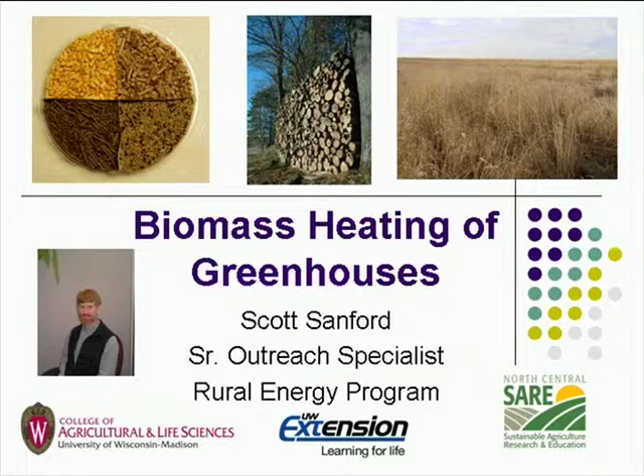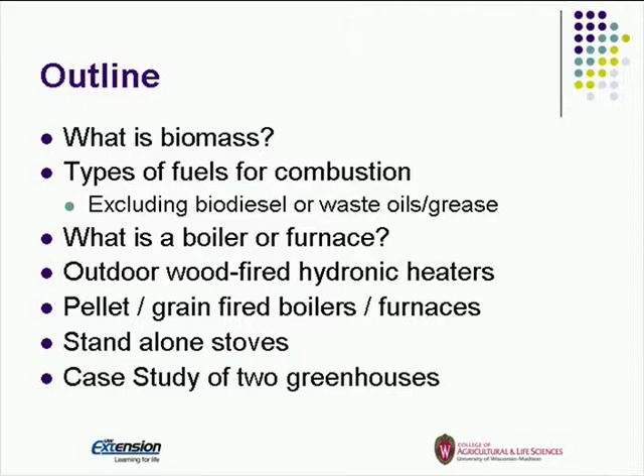So first, biomass fuels. Basically, the definition is a fuel that's derived from plant matter. So it can be wood, that's the most common, been used for years. It can be grains. It can be byproducts like cherry pits or sunflower hulls.

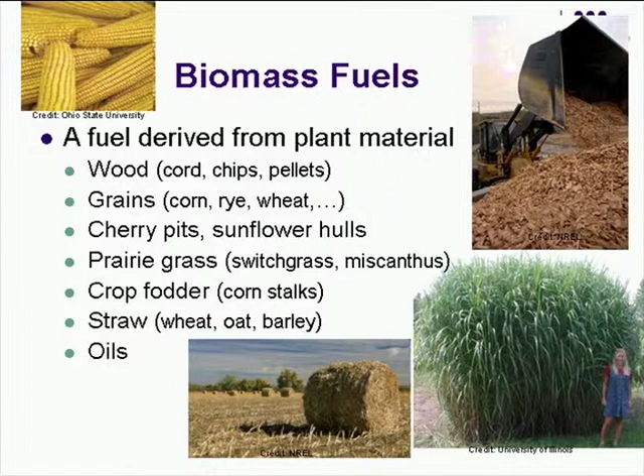Also, it could be crop fodder, corn stalks, soybean stubble, it can be straws, and it can be oils. And we'll talk about the different types of biomass-derived oils. So we can use these things directly. For instance, wood and grain can be used directly. Some of these items are bulky, so things like straw and prairie grass, hay, they can be used directly, but they're better off densified in some manner. It depends on the type of stove you have as to whether you can feed them in bulk.

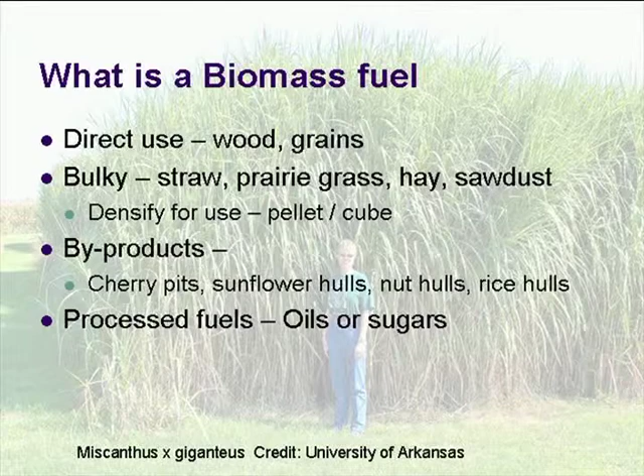Of course, we've got biomass byproducts: cherry pits, sunflower hulls, nut hulls, rice hulls are all some possibilities. And processed fuels, so they can be processed from oils or sugars. One of the things the USDA is working on is to try to produce cellulosic ethanol, or ethanol from cellulosic materials. The picture in the background is Miscanthus giganteus. This is a warm season grass. It's a sterile hybrid. The University of Illinois has been doing work on growing it. I think they can get about 15 tons per acre, one cutting a year. And it'll grow up in Wisconsin. I've got some, but we don't get quite the tonnage.

So some material characterization. These materials are handled differently, so we've got different units of measure. It can be volume. It could be cord, which is a volume. It can be by weight, tons or pounds, gallons. Moisture can have an influence on these. The higher the moisture, it can reduce the energy content. In order to burn something, we have to evaporate the water to initiate the burning process. So it takes energy to evaporate the water, and that's a loss from the gross energy that we could use.

Now, the energy content is typically in BTUs per unit of measure. In the literature, you'll find there's a low heating value and a high heating value. The low heating value is the energy after moisture is evaporated. The high heating value is if the moisture can be condensed after combustion. Where that high heating value comes in handy is if we have, say, a high efficiency furnace which has an extra heat exchanger that condenses the moisture out of the flue gas to capture some more energy. That's where you might want to know the high heating value.

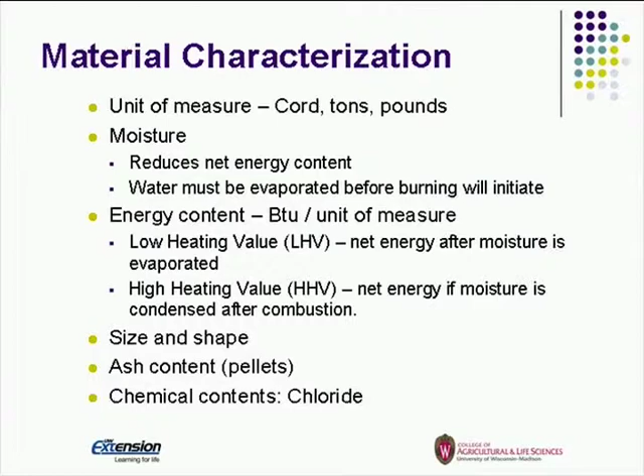So for types of wood fuels, one is that the energy content will vary with moisture, density and ash. We have basically 4 different types of wood that are typically used. We have cordwood, which is traditional. We have green mill residue, such as hogged bark and wet sawdust. Typically it's over 20%, and it can be stored outside in piles. You know, if it rains, it's going to grab some moisture, but not quite as much.

We have dry mill, so this could be shavings from, say, a furniture factory or a sawmill, planing operations where it's less than 10%. And most of the wood pellets that are made today, that's what's used. And we have wood chips. This can be whole wood, whole trees chipped up, or it can be limbs and stuff. Here in the city of Madison, they're urban woodlands. They gather the brush or limbs and chip it up, and people can use it, and it can be burned.

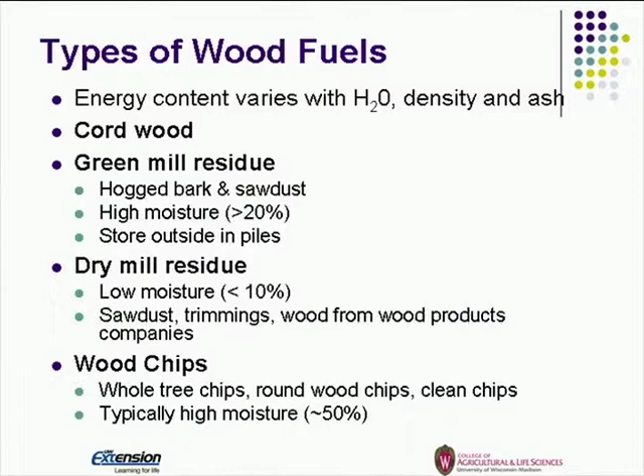So direct use with wood, it's typically sold in cords of wood. A cord is a volume unit measure. It's 4 foot by 4 foot by 8 foot, or 128 cubic feet. There's an error on the slide. The moisture as harvested is about 50%. We need to air dry it to 20% or less. And depending on the type of wood, it may take a year or 2 to do that.

The energy content will vary with species, mainly because it varies in density. The rough average is about 22 million BTUs per cord at 20%, but it can range from about 14.7 to about 30.7 million BTUs per cord. The density varies. So, for instance, basswood is 2,100 pounds per cord, versus hickory can be 4,100 pounds per cord, so almost twice the amount, based on the same volume of wood. All wood is about 7,000 BTUs per pound at 20%. So if you've got lighter wood, you need twice the volume to get the same amount of weight.

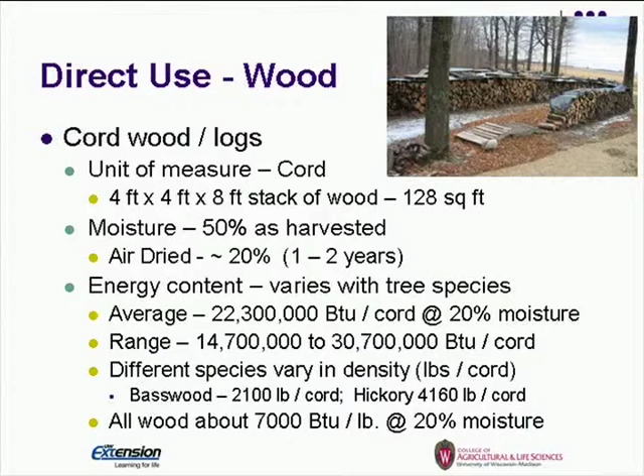So direct use. One of the things I like to talk about is people say, well, I got a woodlot, it's free. Well, it may be lower cost depending on what you charge for your labor, but it's not really free. It's actually pretty labor intensive unless you have machinery. Typically, to get the wood from the field to where it's used, it's handled 3 to 6 times. You got harvesting, cutting, transport, split, pile, stack, and then take it to your boiler and feed it in. Air drying takes a minimum of 1 summer, and 2 is better. So you got to plan ahead, a year or 2 ahead.

You got labor to refuel. There's no systems that I'm aware of that'll automatically fuel cordwood, and you've got ash disposal. Now, it's a much reduced volume, but you still have to get rid of it somehow. That fertilizer content could be spread on the field. And some of these boilers are basically very high emission. There's regulations on their use in certain areas. So that could be an issue.

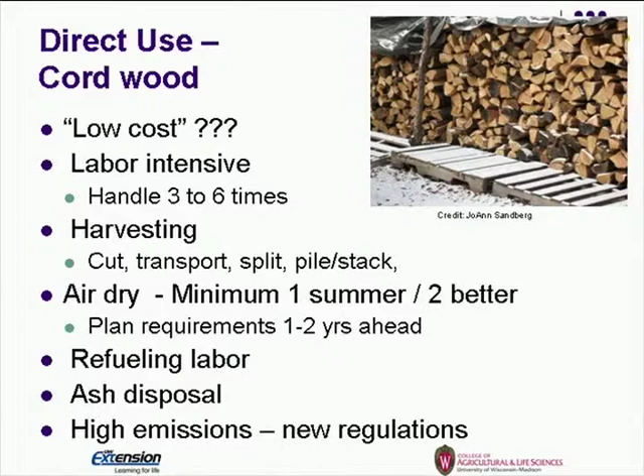The other would be green wood chips. They are low cost. Usually you only use them if they're locally available. They're bulky. Typically the energy content is going to be much lower, about 4,500 BTUs per pound, because they have to drive off a lot of moisture before it's going to burn. It does have the advantage that we can handle it in bulk, so it can be done with augers or conveyors, or bucket loaders. It can be piled outside or in a bunker or covered, depending on your type of system. But because of the bulk, you either have to have space or have somebody that's willing to provide it in a timely manner as you need it.

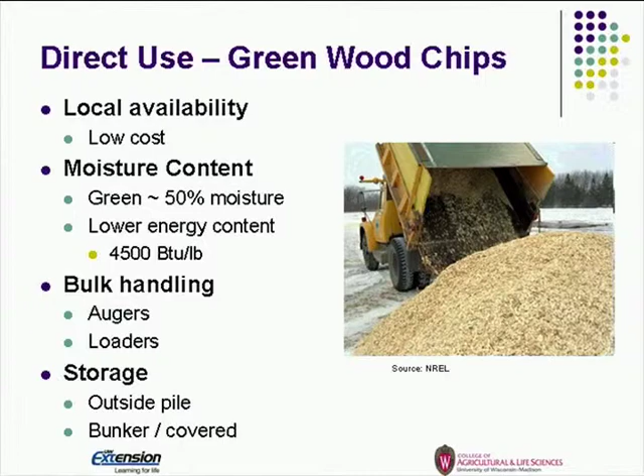So corn would be the next topic. And the green mill wood would fall kind of in the wood chip area. It's a little drier, but it's going to be chipped up and used in bulk. So corn, the unit of measure is usually either bushels or pounds or tons, depending on how you sell it. If it's in bulk, it's usually bushels, although it could be by weight in 40 or 50 pound bags, depending on the distributor. Corn, when it's sold or traded, is traded at 56 pounds per bushel at 15.5% moisture.

So if you go to a feed mill and say, I want a bushel of corn, it may be a little drier, but probably 14 to 15% moisture at that weight range. Now, at 15%, it doesn't actually burn that well. So some retailers will dry it down to 12, where it burns much better.

And you can see the energy content here can be from about 6,800 at 15% to 7,100 at 12%. So you actually get a little more heat content on it. You're going to expect to pay a little more for it because they've had to put some extra energy in it to get it dried down.

Some of the advantages of corn: it's readily available. There's no processing. It's an annual crop, so it's easy to get a hold of. The disadvantage is it leaves slag or clinkers, which is the biggest problem you have with it. And basically it's liquefied ash, and then it solidifies as it cools.

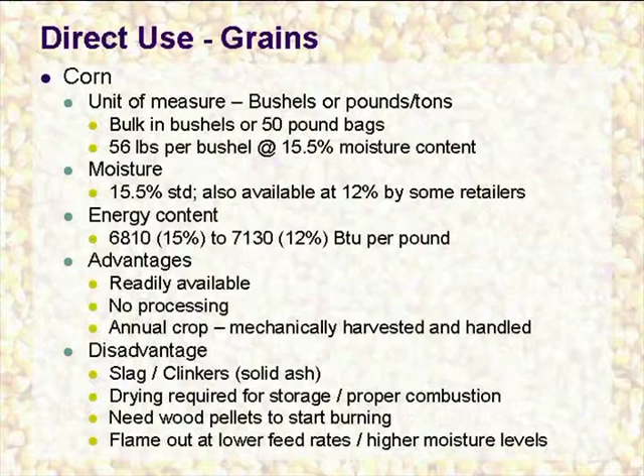The other disadvantage today is that we've got corn selling for $6, $7 a bushel, so it may not be as cost justified as using a wood pellet, just because of the cost and competition for the grain. But some companies will buy a grain that's not fit for animal feed, and maybe got heated or something, so it may be out of condition grain that they will use for this.

Now, there's other grains that also can be burned, and here's a list. We got wheat, oats, barley, rye, even soybeans and sunflowers. And these are the trading weights and moistures that you would expect if you went into the feed dealer; that's the trading weight that would be used.

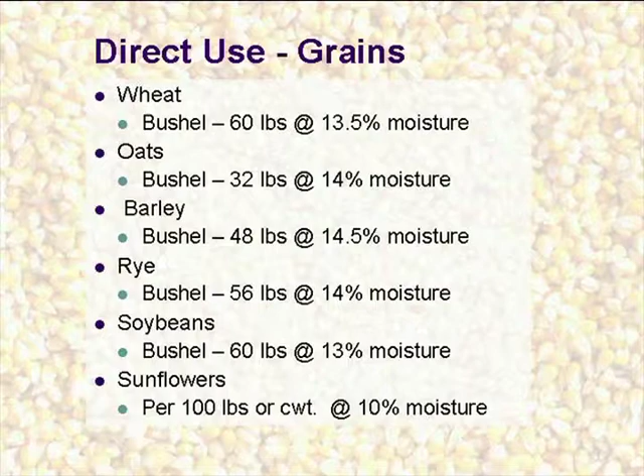So how do we calculate heating values? I've got it here for corn, but it would go for wood as well. If you know the bone-dry weight or bone-dry energy content, and this can be done on a calorimeter. So for corn, it's about 8,250 BTUs per pound. Well, if I have 15% moisture, basically I've got 85% corn and 15% water in that product.

Well, the water is going to require a minimum of 1,050 BTUs per pound to evaporate, so I can easily do that because I take my 0.85 times 8,250, subtract from that the amount of energy to take the 15% of water out, and you end up with 6,855 BTUs per pound. So that would be my net, or my low heating value. So that's just an example of how that would be calculated.

In a furnace, there are other losses from heat transfer and air and stuff, and typically you're going to find efficiencies around 80% for a well-built, high-efficiency type boiler furnace.

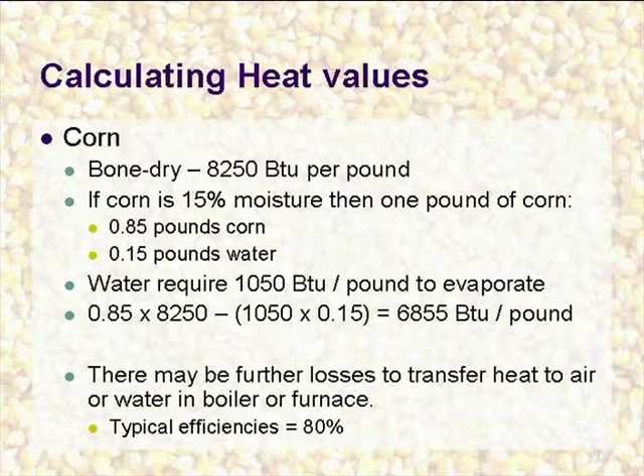Densification. We talked about some of these products are very bulky, so they can be densified. We have a project here at the University of Wisconsin, the picture in the upper right corner, where we're looking at making pellets, and this is actually using an old machine that used to be for pelletizing alfalfa for feed that we've been using to try to see if it will work for densifying in a field. So that's an example of canary grass, and they're looking at other products as well.

So densifying, what are the advantages, or why would you do it? It facilitates handling and reduces transportation costs. You can use byproducts that are low value products. You can mix a couple together, and you'll get a uniform product. You can use bulk handling typically, depending on the size. You do need dry storage because if these things get wet, they start breaking apart. The biggest advantage, you can do automatic stoking.

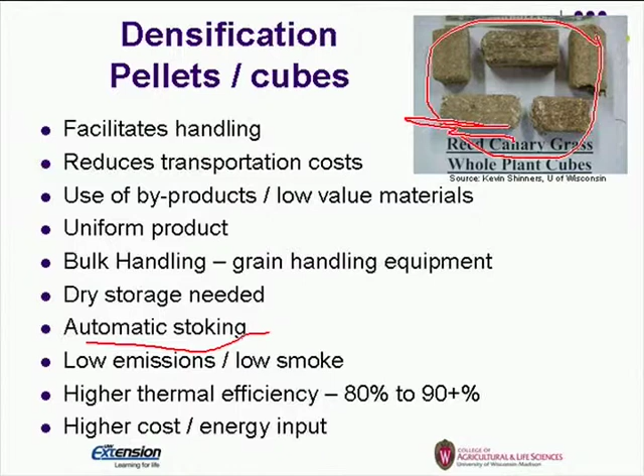If you've got something in a cube, this size cube up here is about the size of a coal nugget, so it could be run in a coal furnace, so that would be an advantage in a boiler. Typically, they'll have lower emissions because of the uniform product, and they can have high thermal efficiencies, typically 80%, but with small pellets, there are some stoves, or boilers that come out of Europe, that are in the 90-plus range. They are higher cost, and they have higher energy inputs to make them, so that would be a disadvantage.

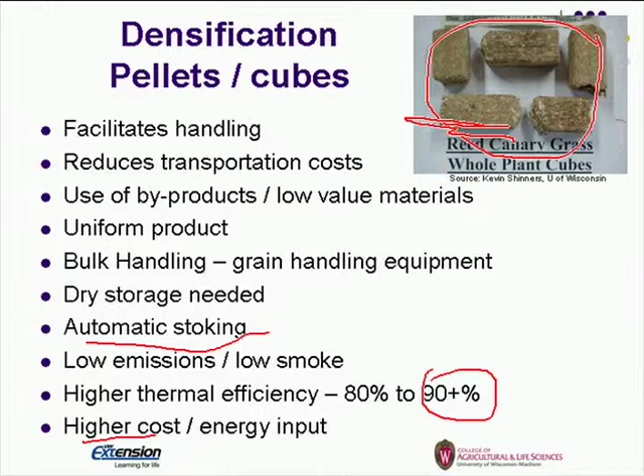So some of the materials we'd use in wood pellets would be sawdust or wood residues. So say a planing operation that's making boards would have a lot of wood residue. They can use it. And there's competition for those products with the animal industry that uses sawdust or wood chips for bedding.

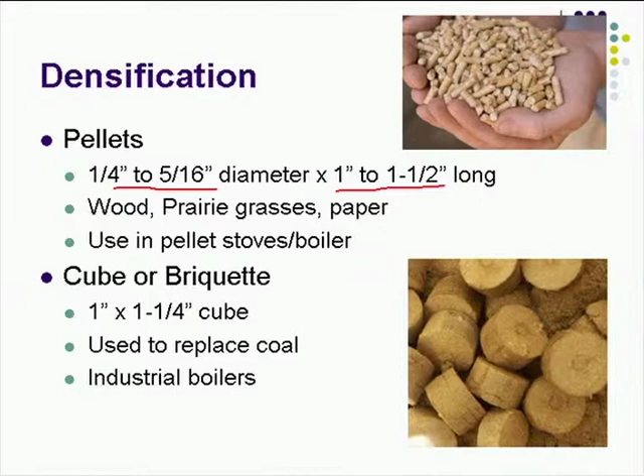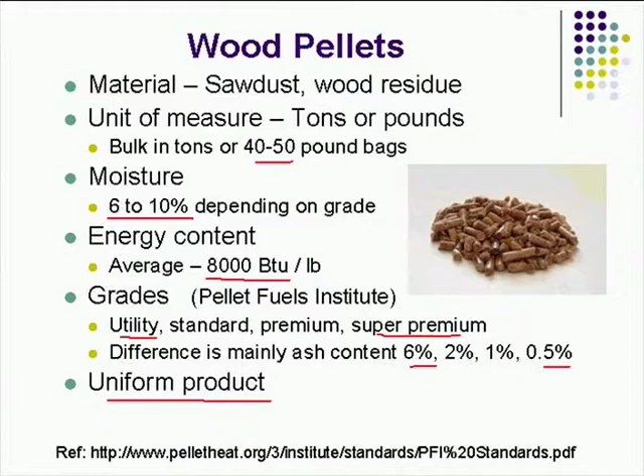The biomass pellets, there are some companies out there making pellets out of biomass. They can be prairie grass, switchgrass, miscanthus, any kind of hay, straw, fodder. You can put nuts, hulls in it, could add some wood residue, kind of a mix of whatever happens to be around locally. Usually this is sold in tons or 50-pound bags. The moisture is higher. It's typically 8 to 11%, and the energy density is going to be about 7,200 to 8,000 are the ones that I've found available. The ones that are 8,000 are going to have more wood content in them, and the ones that are toward the 7,000 mark will have possibly less or little wood content.

Chlorine content in these products becomes more of an issue. Grass has a higher chlorine content. If you let it senesce in the fall and harvest it in the spring, when it's dry, you'll have less of the chlorine content. But it's a problem because it's a high-temperature corrosive agent, so it can corrode the boiler over time and increase your maintenance or shorten the life of the product. And basically, the Pellet Fuels Institute standard is a maximum of 300 parts per million.

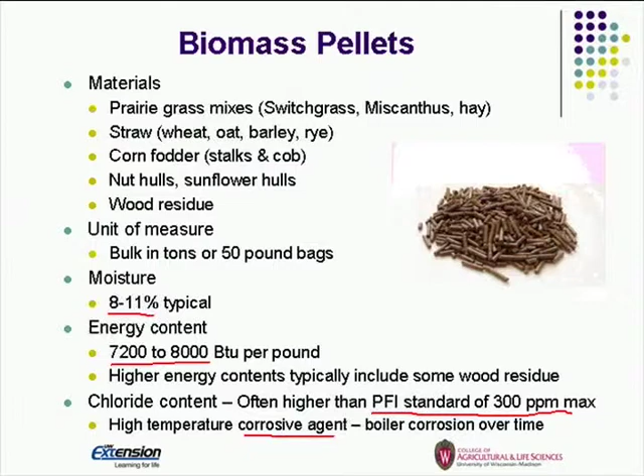So here's some pictures of the difference. So we got corn, we got some wood pellets. Here's some biomass pellets, and you've got a grower. This is actually from a grower that does organic. He uses rye and vetch as a cover crop every couple of years, and then he harvests the grain and uses that in a little pellet stove in his greenhouse.

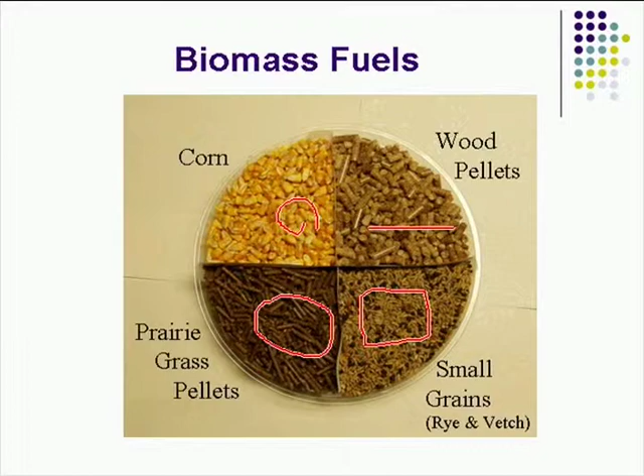So what is a boiler versus a furnace? We often use these words interchangeably. A boiler is going to heat a fluid. It can be water, a glycol water solution. It could be steam. And the fluid is pumped to location typically where it's used. Now, the steam will move by itself, but typically it's going to be pumped. A furnace is going to heat air, and it's going to be blown through ducts to whatever location it's going to be used.

So the pictures I've got here, on the left we've got an outdoor hydronic heater or boiler in a greenhouse. We can have a pellet furnace. This happens to be one that'd be an add-on for a residential place. And then on the far right is a pellet boiler. The boiler is on the left here, and the bin to keep the pellets dry.

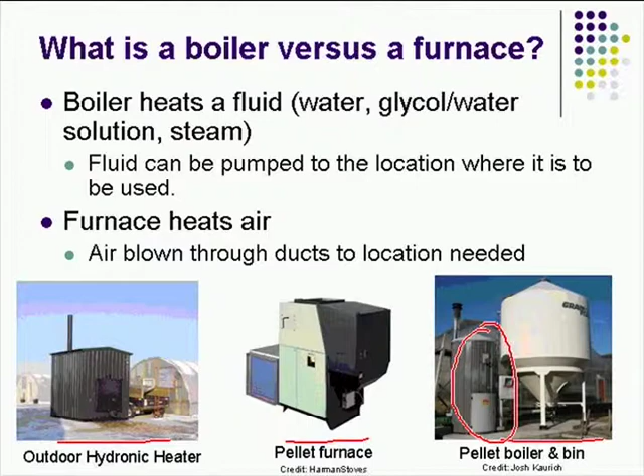Some of the advantages of a boiler is you only need one unit, it can handle multiple greenhouses. So you have a unit, you pipe the hot water or glycol solution to the different houses. It's an excellent way to do underbench or in-floor heating, although you can supplement it with a water-to-air heat exchanger. They can be located outside the greenhouse. Most of these are weatherized, so you can maximize your growing space. You don't have them in the greenhouse. And they can be in a central location with one fuel storage. Otherwise you've got them in all different buildings, and you've got to truck fuel all over the place versus having them in one place.

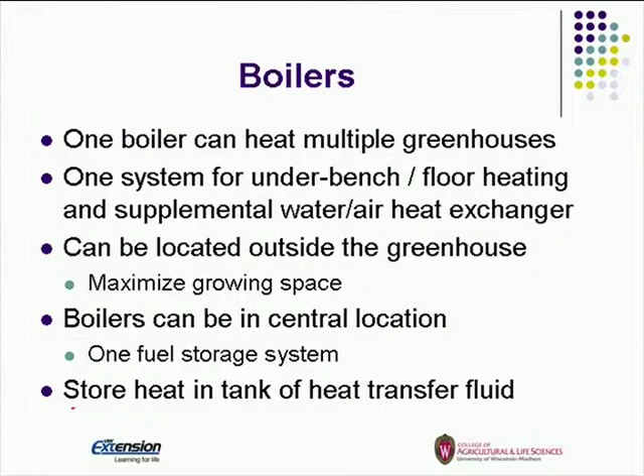And one of the things you can do with a boiler to kind of level off peaks and valleys is to have a tank that you store some extra heat in. I'm going to show you a picture of this in a little bit. So that can be an advantage because you can't do that necessarily with a furnace. A furnace has the advantage that it heats air directly, so you reduce one heat exchange.

They're typically located in or adjacent to the greenhouse, so it can take up growing space. You don't have to worry about leaks, though, with water pipes or glycol solution. You will probably need multiple furnaces per greenhouse because some of these smaller ones don't have very high BTU output. But that also can be an advantage because then you have a backup if one happens to go out. And you need multiple fuel storage and labor to fill the furnace hoppers. So it can be, but not necessarily, a disadvantage.

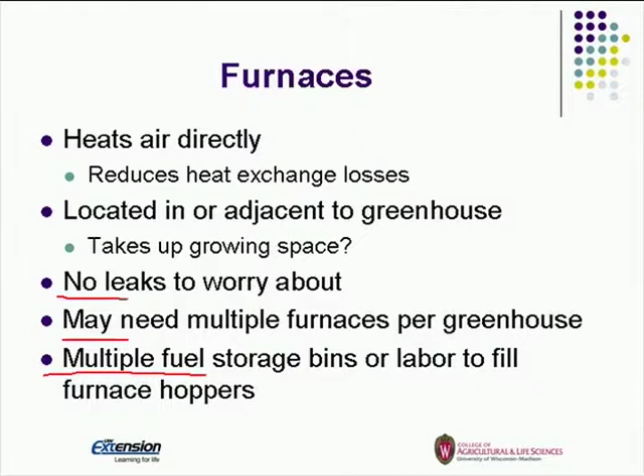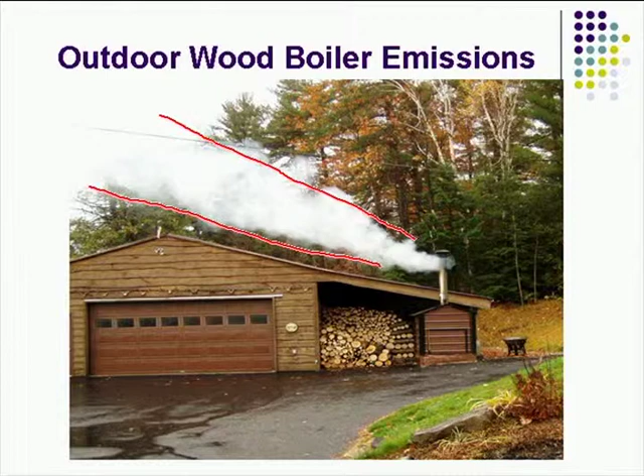Some of the advantages of outdoor wood boilers, though, are they can use low-cost fuels. Wood scraps, pallets. I've already talked about being cheaper fuel. What is the true cost? And one of the issues with these is sometimes when people look at these, they don't look at the true cost of that fuel. You have the opportunity cost. If you're cutting the wood, you could sell it to somebody who's going to burn it in the fireplace, possibly at a higher rate, and then buy pellets, for instance, which burn cleaner, at almost the same price.

So high emissions and smoke is a problem. Now, you can handle this by some management issues. When it's going to be a warm day, you don't put as much wood in. You stoke it at night versus in the morning when you're not going to have the fuel use. Judging on how warm it's going to be during the day is how much fuel you put on it, so you have a smaller fire when you don't need as much heat versus just loading it up and letting it burn.

These outdoor wood stoves are pretty low efficiency. In fact, I was really surprised. The EPA has been working on this because of the emissions standard. They have a voluntary program, and when they started testing these, they found that the efficiency of these range from 20% to 50% with an average of about 40%. Since 2008, there's a voluntary standard and a listing of the stoves that meet this new EPA requirement.

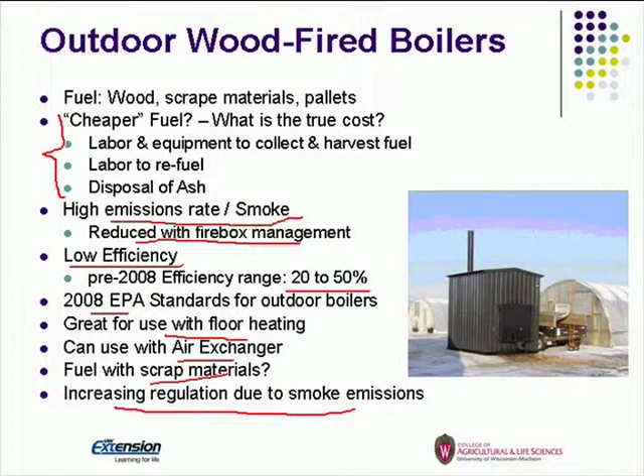The advantages of these outdoor wood boilers are they're great for heating floors. You can do it with the air exchanger. I already talked about scrap materials you can burn in them. But in some states and some locales, they've actually banned outdoor wood boilers because of the smoke emission problem. The EPA qualified outdoor boilers have 90% less emissions. That's a requirement to meet the standard. But one of the advantages, lower emissions equals higher efficiency. We've gone from an average of 40% to almost 70%.

And some states, as I said, are restricting sales to these EPA-qualified stoves. Unfortunately, Wisconsin is not one of those, and that's an issue. I don't know about other surrounding states, but I know in the Northeast, states like Maine and New Hampshire have banned these things.

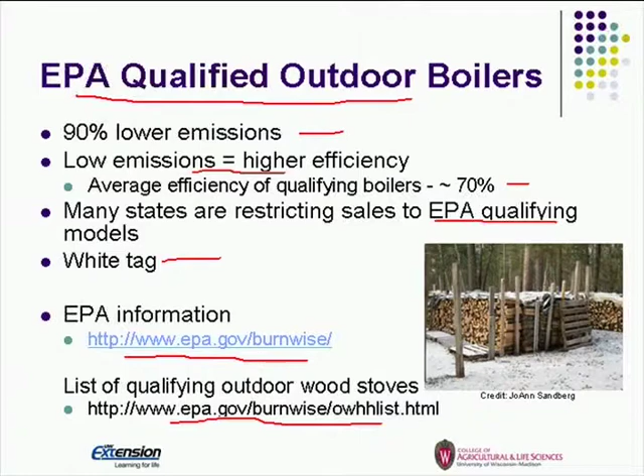You can go to this EPA Burnwise website and get more information, and here's a link to the list of stoves that meet this white tag or phase 2 qualifications. And if you can get a hold of the tag that's on here, it actually has some very good information. It will tell you the 8-hour rating. Typically you load these up and walk away for 8 to 12 hours, and you'll find out that these things don't really have that high an output in some cases. You also find the efficiency and the particulate matter, and there's a graphical emissions comparison between those stoves, presenting emissions, efficiency, and particulate matter in different ways.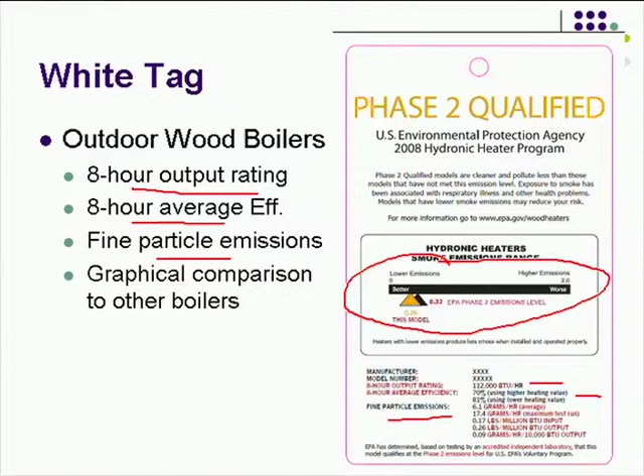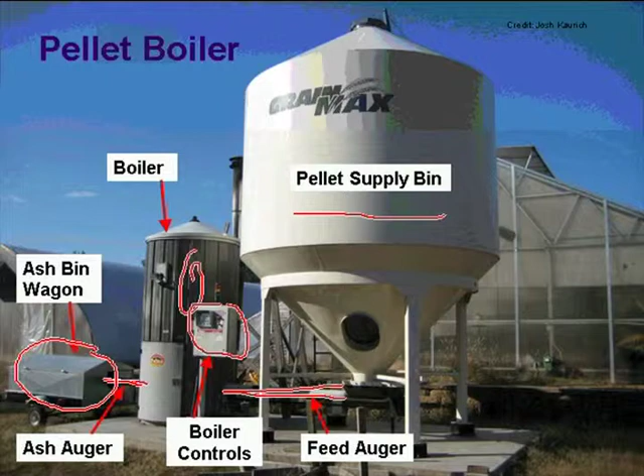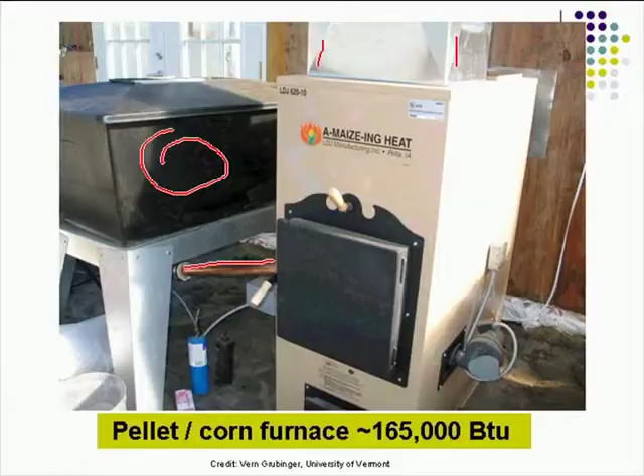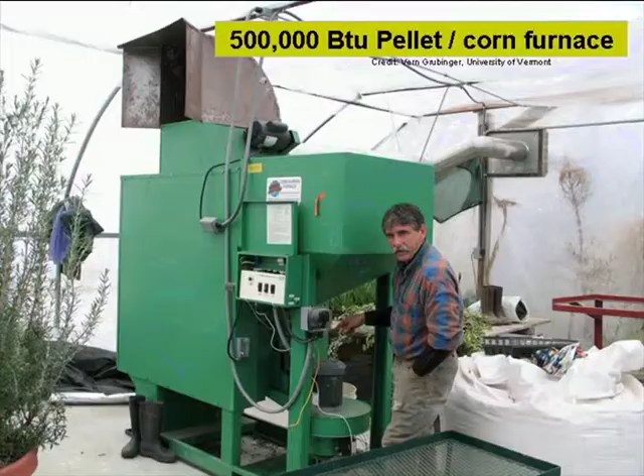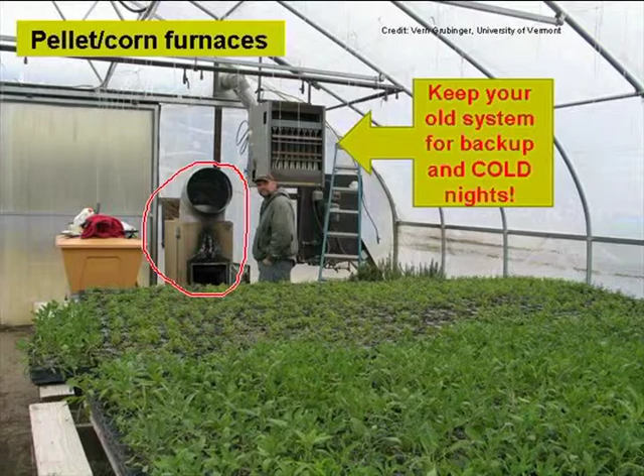Here's an example of one where you've got the new furnace, pellet stove, but I highly recommend you leave the old one because these things do sometimes burn out, or the flame goes out. You have a flame out. And if you have the old system set at a little lower temperature, at least you won't have a total heat out issue.

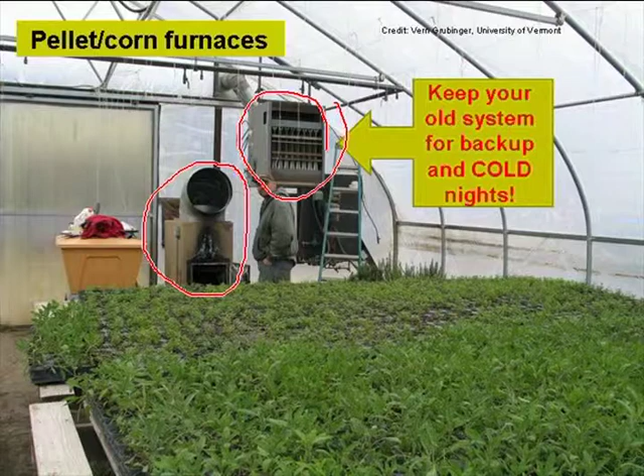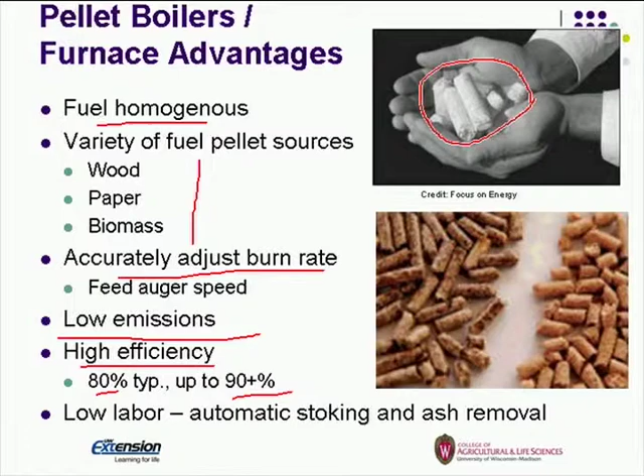The biggest advantage is low emissions and high efficiency. Typical unit is 80%, and there are some out there that are over 90%. Low labor costs. You don't have to worry about stoking as long as you have a large enough fuel bin. These things will run all night, and some of them even have automatic ash removal. But you do need to look at the labor it's going to take to run these.

And the advantage, if you heard our general energy conservation, basically we can produce a microclimate and actually reduce the temperature we required in the greenhouse for heating. And we get increased warm roots, increased growth, and increased production, or faster to flower, depending on what you're growing.

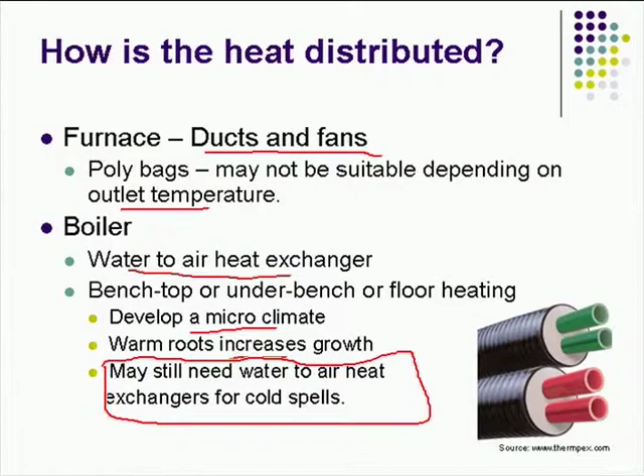If you do use benchtop or in-floor heating or under-bench heating, you will often need some other air exchangers around for those very cold nights, because sometimes these systems don't have enough capacity to keep up on a minus 10-degree night. So here's some examples of some air exchangers that could be used for the general distribution of heat.

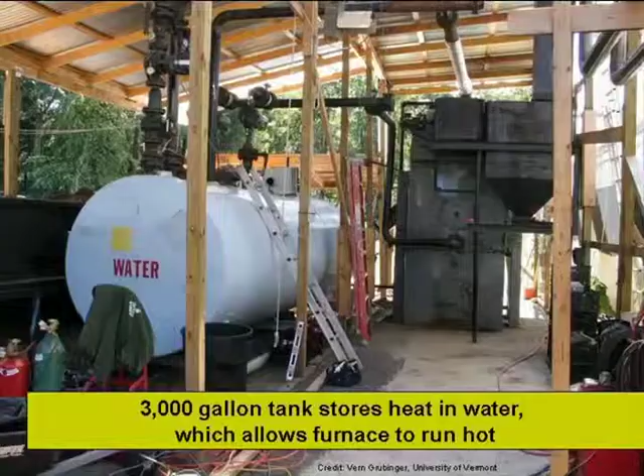Here's an example of the benchtop heating. This has got a little microtube on the top of the bench to distribute the heat through the bench, and a supply and return line. So just an example. Here's an example. We've got a big old boiler here, and to even out the peaks and valleys of that, we've got a big water tank here. So the boiler is actually heating the water in the tank, and then we're drawing the water out of the tank to feed our different greenhouses.

So the biggest advantage here is that we can run this furnace or boiler at a high rate, continuous, and that reduces the amount of emissions. It's burning, the flame is burning hot and steady, instead of constantly flipping the damper on and off. And one advantage of this, you might be able to get away with a smaller boiler because we can level out those peaks and valleys.

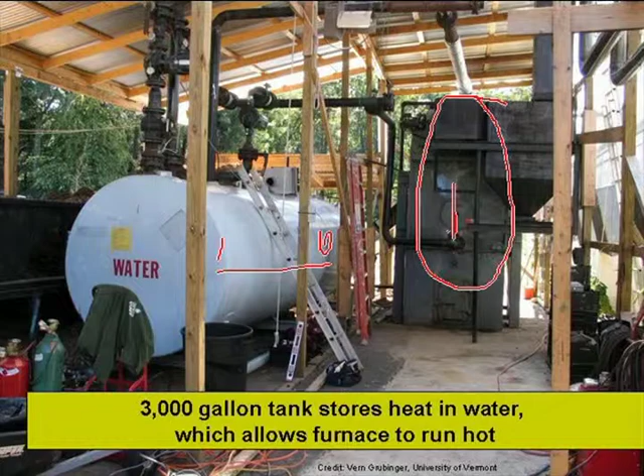Wood chip boilers. We talked earlier about wood chips being a very low-cost, locally available product. Well, you need a boiler that specializes in burning them. So the disadvantage of these is high capital cost and a little higher maintenance. You've got quite a few moving parts because this is the boiler itself, but this is the feed into it. You just have more mechanisms here. But they are very suited for a large greenhouse operation, if you had acres of greenhouse under cover, or schools, industrial applications.

Here in the States, we've got some cheese plants that are actually burning wood waste in their boilers for steam or process heat. You're using a low-cost product to provide that. You will need labor to feed charge hoppers, depending on how your system is set up. Sometimes they're set up with a totally automated bin where you dump the chips into a bin and it automatically feeds them into a boiler. Others, there's a day bin or charge hopper that you have to fill daily or several times a day to provide the wood fuel supply.

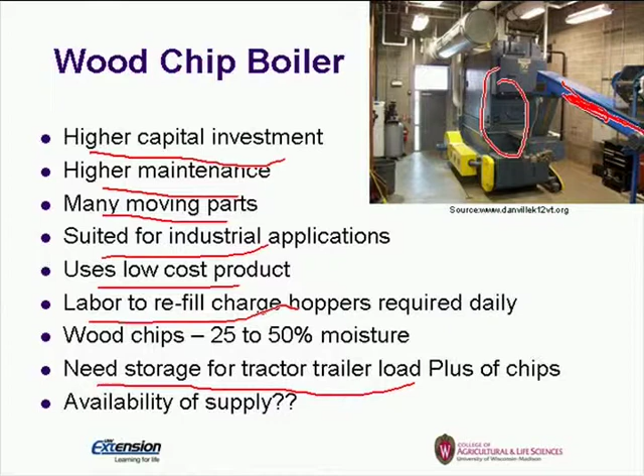You do need storage typically for a tractor-trailer load plus of chips, and you have to look at what the available supply is. That's utmost important, to find a supplier so you have a continuous supply when you need it.

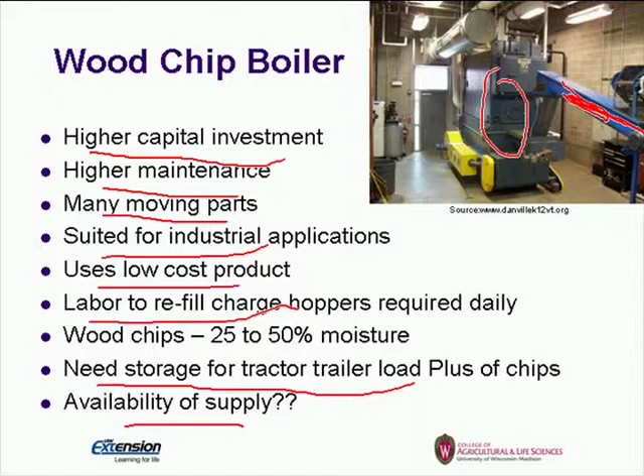Another option for greenhouses would be standalone boilers. These have the advantage of low cost. I mean, this is just a residential type boiler. They're easy to install, fast payback, although it just supplements the heating. It won't supply total heating unless you have a very small greenhouse. The disadvantage is the hopper may be too small to last all night, full burn.

You can see this grower was pretty inventive. He found an old milk filter hopper here, and he sticks that in the top and fills it. They may or may not be thermostatically controlled, so you could have overheating or supply more heat than the greenhouse needs, depending on what the temperature is. And these don't distribute heat. You've got to have some way to push the heat around the greenhouse.

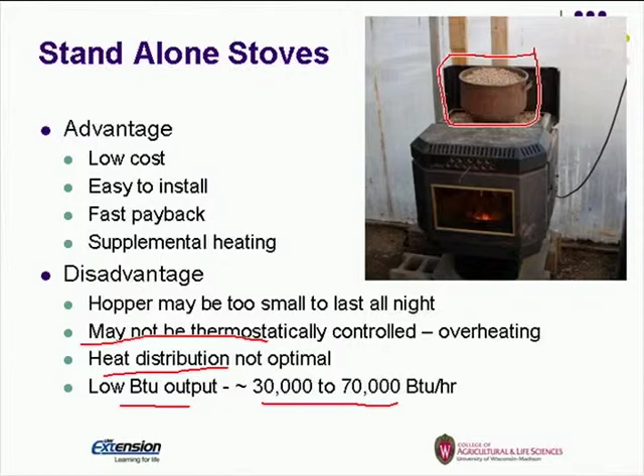Now to kind of bring it down to dollars and cents, because that's what ultimately is going to make or break a project. We've got on top, I've got corn, and what I've got here is the energy content, basically in this column. I've got boiler efficiencies, and if they're in parentheses, that's what I used for the calculations here. I've got the fuel cost, and that's a moving target. I think this was as of October 2008, but with the exception of corn, I think we're probably in that ballpark still. Well, heating oil is probably higher too at the moment, but who knows what it will be by the time we get to heating season.

But this just shows you a comparison on a million BTUs, the cost per million BTUs, and some things to point out is natural gas is very cost effective. Propane, depending on the price, is up there with heating oil at $2.50, but at $3.50, heating oil is going to be the highest price fuel. Your outdoor wood boiler, if it's an EPA Phase 2, would be the most cost effective based on $200 a cord. So it gives you a ballpark comparison.

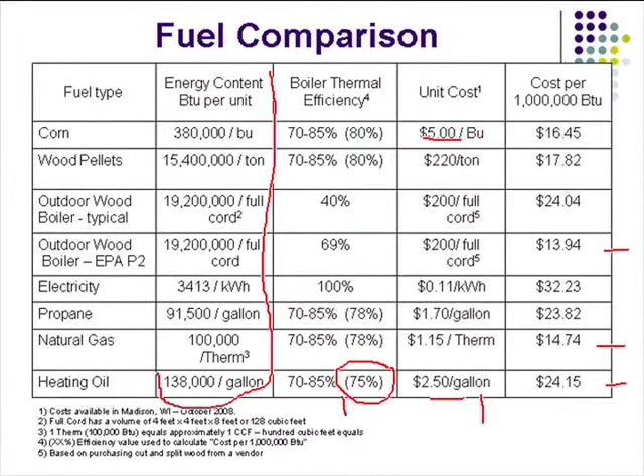So one of the questions is, how do I size my heating system? Well, one thing you could do is look and see what your heaters are now. Typically, they may be oversized. That's typically done. But you can look at it two ways. One, you can do a full replacement, or the other is a partial replacement. And then you rely on your current heating system to back it up on a few cold nights.

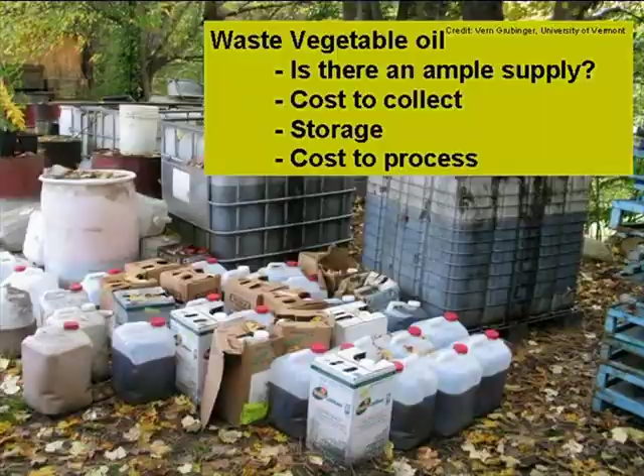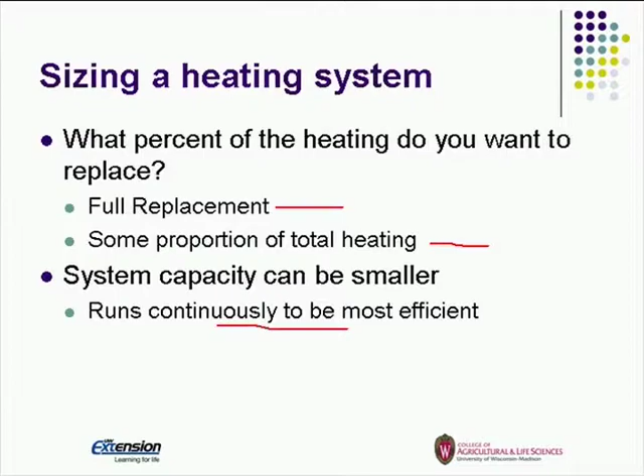When you have a smaller system, they'll run more continuously and be more efficient, so that can be an advantage. Typically, what we find is that 50-80% is a pretty cost-effective percentage to replace, but that all depends on the situation. And we'll see some of that when we do the case study here in a minute.

A couple slides on waste vegetable oil. We hear of Vegemobiles and stuff like that. And basically, they're using waste vegetable oil from fryers. So it is a good product. It can be used. But my question is, is there ample supply? There is competition for it in some cases. What's the cost to collect it? Just because the vendor gives it to you free, you still have time and gas to get it. And do you have storage for it?

In this picture, you have cost to process it. It's going to need to be filtered. You've got to get the water out of it, and you've got to get any sedimentation out of it, or it's not going to burn very well in a boiler.

Okay, so we've got two choices with waste vegetable oils. One is you can convert it to diesel fuel or biodiesel, and that requires some processing equipment, and then you can burn it in a standard oil burner. And I'm not going to get into that process.

The other option is that you can buy what they call a waste oil burner. You have to filter out the particulate matter and the water, and typically it's going to be a higher viscosity, but it's got a line heater on it to make it work. So that's another option for that. So it all depends on supply.

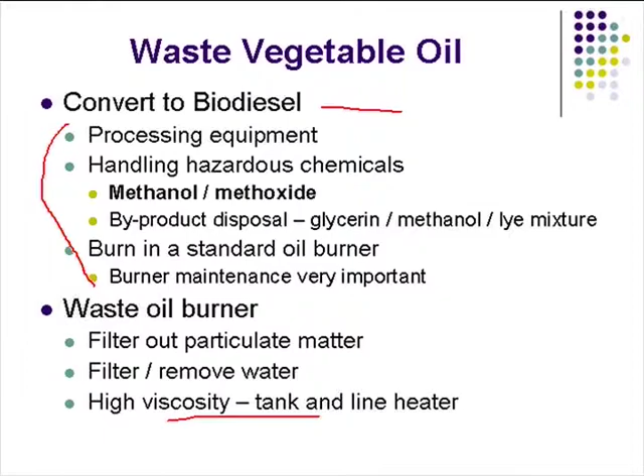So now as we get to our case study, we're going to look at two different size greenhouses. We're going to look at a 30 by 60 or 30 by 96 freestanding, and then we're going to look at about a half-acre gutter connected and see what their options are. So for this one, I used a double poly glazing. I'm looking at spring bedding plants, so February to June, typical spring growing season.

The current greenhouse has two 200,000 BTU power vent heaters in it. They're about 78% efficient. I did this one on $2 a gallon propane with a daytime-nighttime set point of 70 and 60. It's actually located just outside Madison, this actual greenhouse.

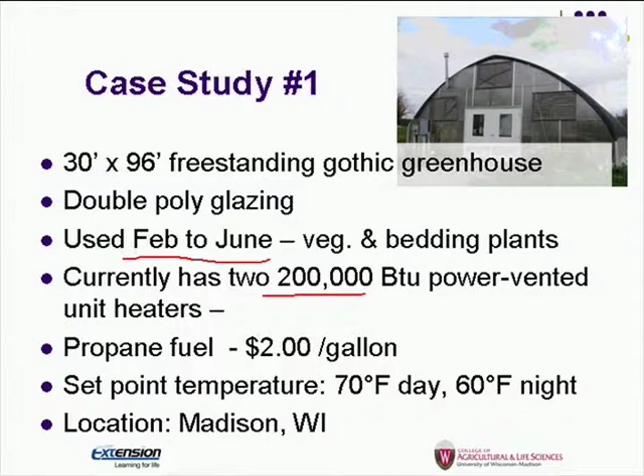So we looked at a couple different options for this greenhouse. Option A is a standalone residential shop type stove. It's got a 70,000 BTU output. It's mainly going to be operated at night just to supplement the heat. There's no thermostat on it.

Installed cost is $4,350. It's 80% efficient, and we're going to use bagged pellets at $4.20 a bag, or $210 a ton. Now, you could get bulk on this, but then that's going to increase your installed cost because you have to have a bin.

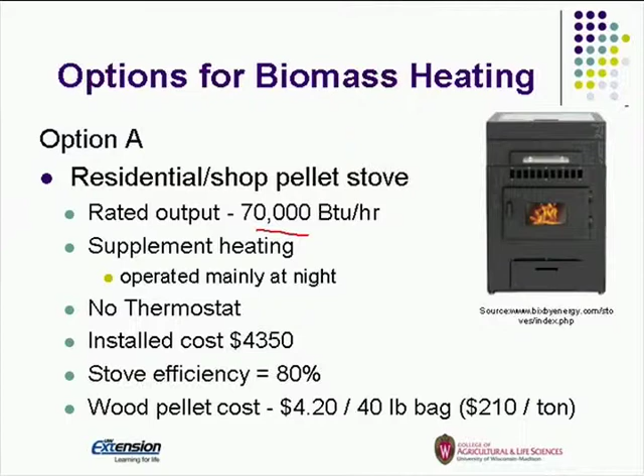Option B is a thermostatically controlled pellet furnace. This has an operating range of 10,000 to 160,000 BTUs per hour, 80% efficient. We're going to have this air ducted into the greenhouse directly above the plants. It'll be located in one end of the greenhouse, so we've got to push that air around. It has a 14-bushel feed bin, so it should last the night. And again, we're going to use bagged fuel to avoid bulk storage costs.

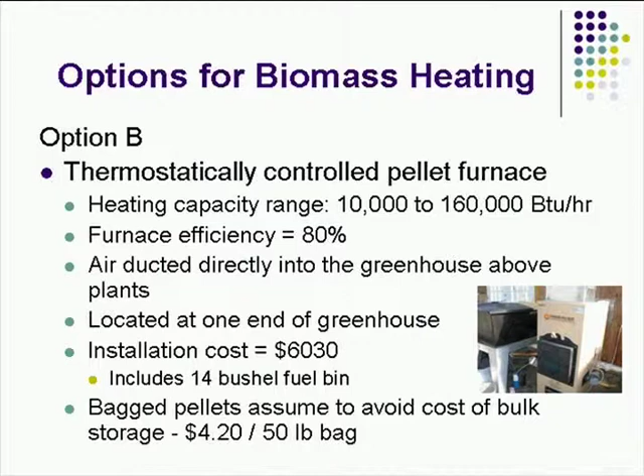The third option we're going to look at is using an EPA Phase 2 wood boiler. This one has an 8-hour rating of 160,000 BTUs per hour. We're going to use 2 air exchangers in the center of the greenhouse, and basically we're going to face them in the opposite direction so it works with our horizontal circulating fans in the greenhouse to distribute that air a little more evenly.

It's going to be thermostatically controlled, so we're going to have a pump on it that'll circulate the water glycol solution to our heat exchangers when the greenhouse needs heat. The installed cost, including everything, is about $13,000. It has an efficiency of about 75%. And I'm going to assume $150 per cord, assuming you're going to harvest it yourself and not have to pay profit to somebody.

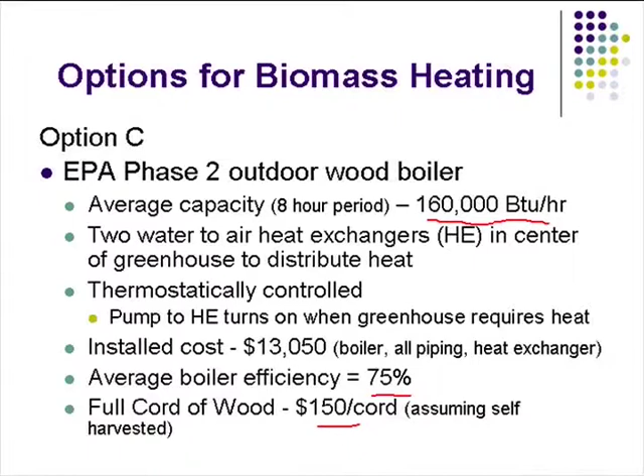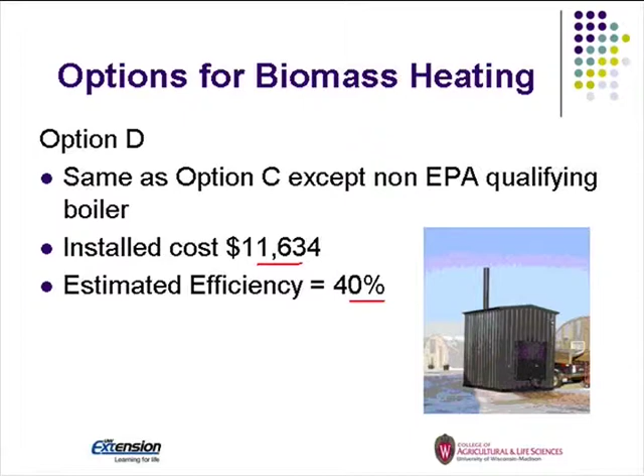Option D is the same as C, except we're going to use a non-EPA qualified boiler. The cost on that is about $11,600, and it's 40% efficient. So that's kind of what we're going to use for the options. Now, how much heat can we get out of the greenhouse? We basically have to heat February, March, April, and May.

So the daytime heating needs, on average, can be met fully by solar radiation. Of course, it's going to vary. Some days you'll need it, some days you won't. But it will usually be less than nighttime heating needs. So we're going to kind of ignore that at this point and just assume that we're going to need some heating in February, about 136,000 BTUs per hour.

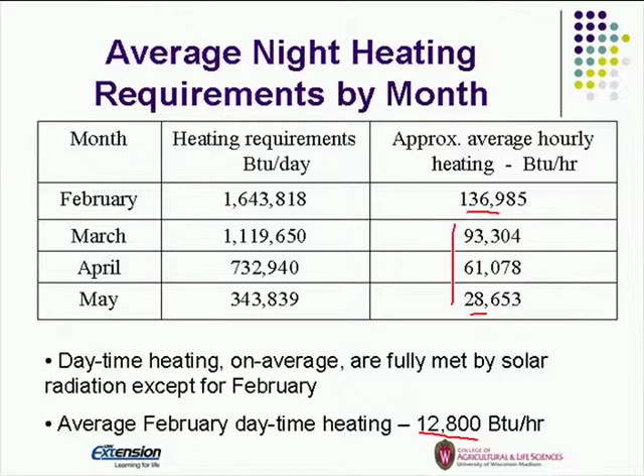So how much biomass heating can be provided? We've estimated for option A, which is the standalone stove, 100% of the heat can be provided down to 40 degrees. I did this basically with a model to look at the heating requirements, and then we're going to estimate about 50% reduction in propane costs based on that.

The other options, we've got a 160,000 BTU boiler or furnace, and we're going to be able to supply 100% of our heating down to about 10 degrees Fahrenheit. Well, on average, the monthly minimum temperature for February is about 14 degrees. Well, we know in reality we can't provide 100%. There's always going to be some time when we can't.

So that's based on the averages. So we're going to assume that in reality we're going to need propane about 20% of the time to meet those really cold nights and maybe some days earlier in the season when it's not worth starting up that stove for a few hours.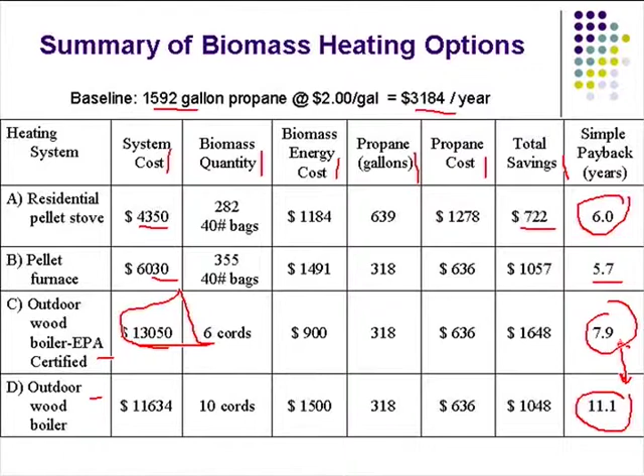The second piece of our case study here is a gutter-connected greenhouse. This one happens to be in a T-shape. The one I modeled, it's 33,000 square feet. Double poly film glazing on the roof and walls. This has got like 14-foot high walls on this particular greenhouse. Year-round production, so heating in the fall as well as the spring throughout the winter. You've got in-floor heating in this greenhouse with peaking units for those cold nights. $2 a gallon propane.

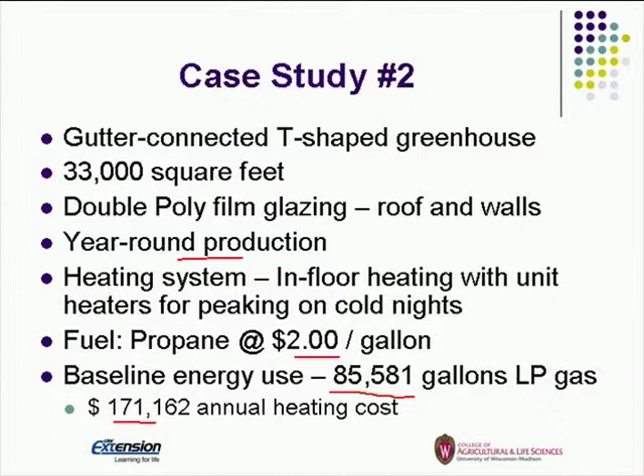So based on our model, we found that this greenhouse is going to use about 85,000 gallons of LP gas a year, or about $171,000 a year. So that's a pretty darn hefty bill to the fuel company. We're going to look at some options here, but this first one would be to use an outdoor wood boiler, which is very popular. We could use the best, which is 75% efficient. We would need 389 cords of wood. Well, that's a lot of handling, a lot of labor requirement.

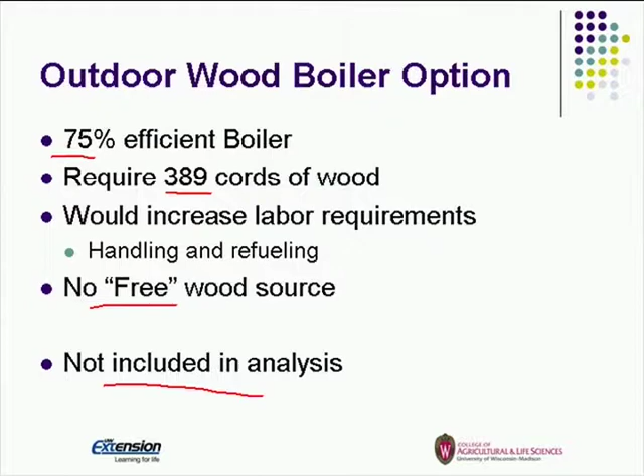This particular grower doesn't have a wood lot that could supply that kind of wood, because he didn't have a free fuel source. So we didn't include that in this analysis. It just wasn't going to be viable for this particular operation. So we're going to look at pellets for this operation. So here's his requirements on an average nighttime temperature, and what you're going to find is that January, February, and March are the highest months. Basically, you need about 2,600,000 BTUs per hour to meet the average heating requirement for this particular greenhouse.

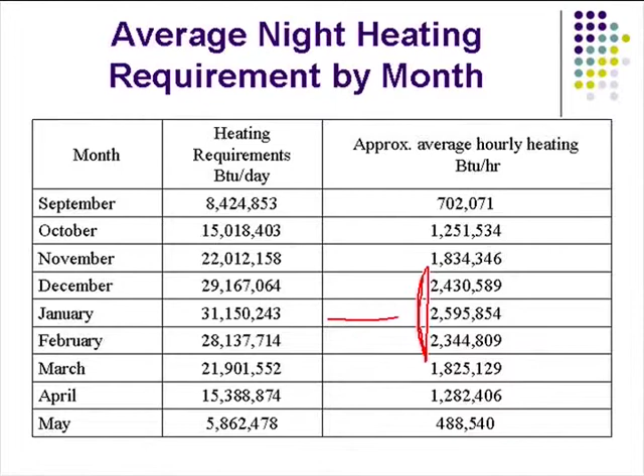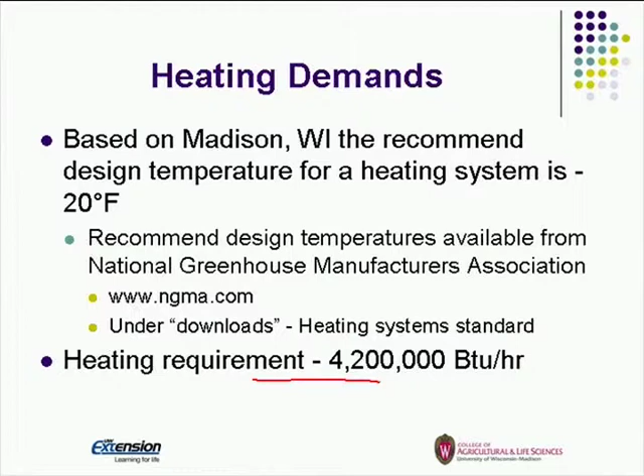So we did a design temperature down to minus 20 degrees, and that's basically based on some recommendations by the National Greenhouse Manufacturers Association, and found out the heating requirement for the biggest design, if we want to replace 100% of the fuel, which this grower wanted to look at, was about 4,200,000 BTUs. So what I'm going to try to show in this is the difference between 100% replacement and partial replacement.

So option A, we're actually going to use two furnaces so that we can look at middle of the winter versus spring and fall. So what was recommended was a 3.5 million BTU per hour boiler and a 1.5 million BTU per hour boiler. The average efficiency of these is 78%. We're going to use that small boiler in the spring and fall, and basically having two boilers, we can throttle them depending on what the demands are.

We're still going to assume that about 5% of the season we're going to use propane. One, because you're going to have some time when, even with a small boiler, it's going to be too big to throttle down without overheating the greenhouse. And we're going to have a backup anyway, possibly. So we're going to have bulk bins for bulk delivery of the pellets, and this was going to cost almost $300,000 for this particular operation. So a good chunk of change again.

Option B was to try to just meet the average heating requirement. So we downsized this. We have a 2.5 million BTU boiler and a 1 million BTU boiler. Again, the smaller boiler will be used in the spring and fall. So just to try to meet the demand a little better, we assumed here we're going to use 20% propane. Again, bulk delivery of pellets. This reduced the cost to $211,000.

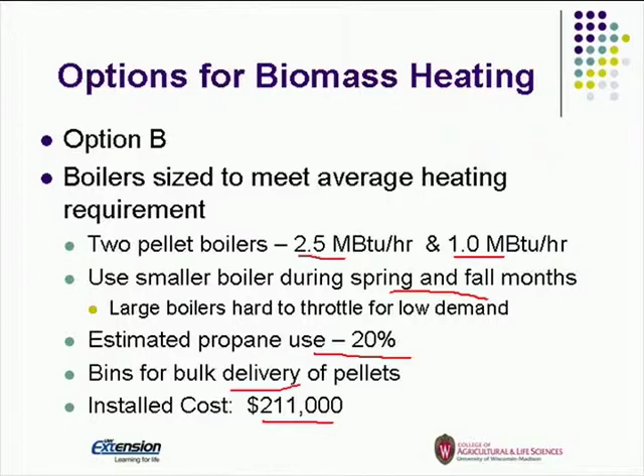So here's the numbers, because the economics is what really matters here. So here's the amount of pellets we're going to use, the pellet cost, and I think this was based on, well, let's see, I didn't put the fuel cost in here. I think it was based on like $175 a ton delivered. The propane cost and the energy savings.

So you're going to find here, both these are actually excellent paybacks. You know, anytime you get under 4-year payback, that's 25% return on investment. So both of these are excellent paybacks for this particular operation.

Just a point here, you know, when we look at energy efficiency or doing a biomass project, one of the things that you really should compare with a biomass option, if you want to look at biomass, is the energy efficiency options to reduce your total energy requirement as well.

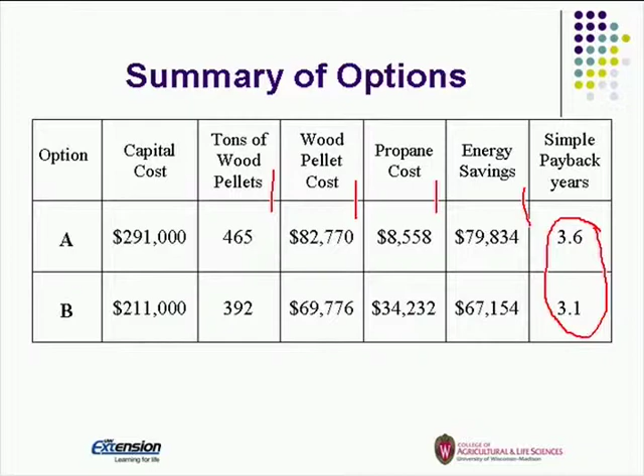In this particular gutter-connected greenhouse, this person also had natural gas available, but he wasn't using it. And if he had converted his greenhouse to natural gas at the current costs, he could have saved $90,000 a year just on fuel costs, just by converting to a lower cost fuel, which was already available. And then he could take that $90,000 and put it into, say, an energy curtain to reduce his costs even further.

So here are some resources that you may find advantageous. There's 2 companion bulletins here on basically this presentation. There's a biomass calculator looking at different biomass and replacement versus fossil fuel. This is a website that one of my groups worked on. So you may find that.

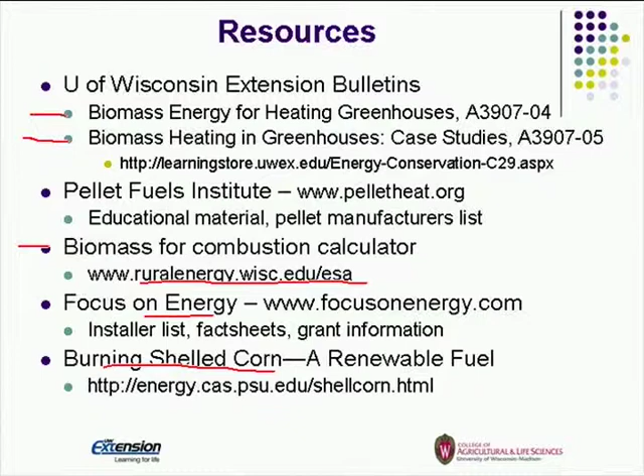There's some fact sheets that focus on energy, which is the Wisconsin Energy Efficiency Program. Also, Iowa State has some very good bulletins on theirs. Here's something from Penn State on burning shelled corn as a renewable fuel. So those are some resources that you may find advantageous. And with that, that's the end of the presentation.